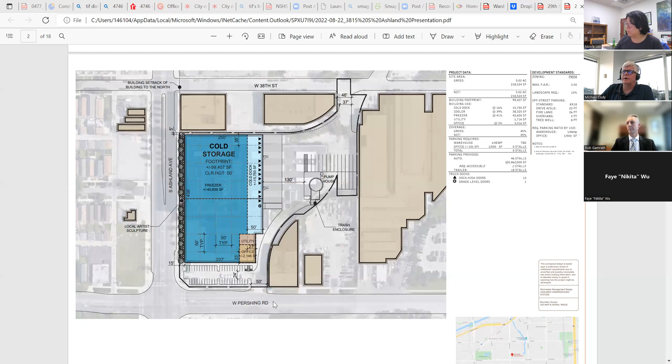If we could proceed to a couple slides later, I mean, we could go through each slide, but there's really not a lot to talk about relative to the adjacent zoning, the adjacent properties in the neighborhood.

You can see the zoning district. We're part of that planned manufacturing district.

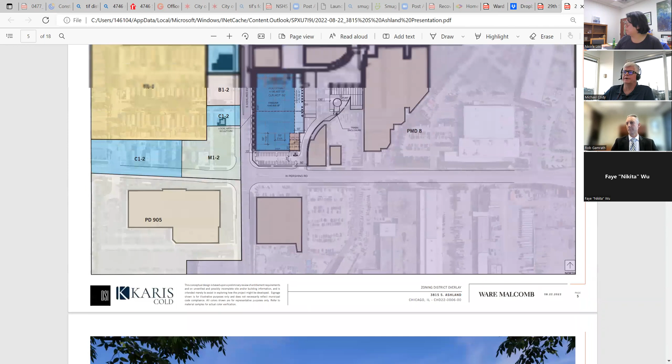The next slide is what I wanted to get to with the rendering, and we can go back if there are any questions. Being a cold storage facility, the nature of the product limits us in some of the design capabilities.

We're utilizing what's called an insulated metal panel, which is a freezer panel. It allows us the ability to be 100 degrees on the outside during a hot August night, and 20 below zero on the inside. We haven't defined what temperature we're going to be, but because of that, the coloring on these panels is very important, so we're limited in the color pattern we can use.

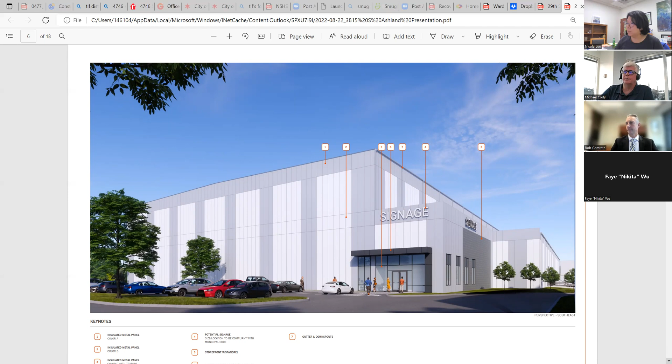But what we're describing here is the architecture that we've utilized. The freezer clear height is 50 foot, and you can see where we've integrated the office at this southwest corner. If you scroll down, you can see some of the other materials we're utilizing on the building.

I'm actually going to zoom into the copy that I have as well. Insulated metal panels with a couple of different colors. We do have signage, obviously, and then storefront. If you can go to the next slide.

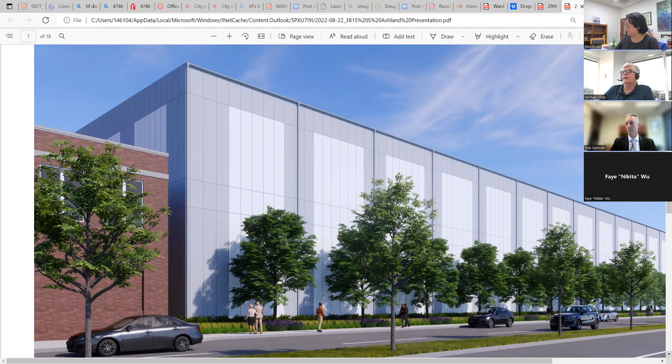This shows the Ashland Avenue side of the building. Again, heavily landscaped. We've tried to create some articulation on the wall that creates an interesting facade. Obviously, being cold storage, we can't pop windows in there, and again, we're limited in the amount of color panel we can utilize. So we've decided as a team, along with the City of Chicago's site planning team, to provide a little bit more of a setback and again heavily landscape that area.

If you go to the last slide, this is the opposite end of the building showing the truck docks. Not very exciting, but it's kind of the business end of the facility. I'll take any questions that anyone has.

Maybe we want to continue to present the whole thing, Rob. Sorry. Yeah, I think that's a good idea, Mike.

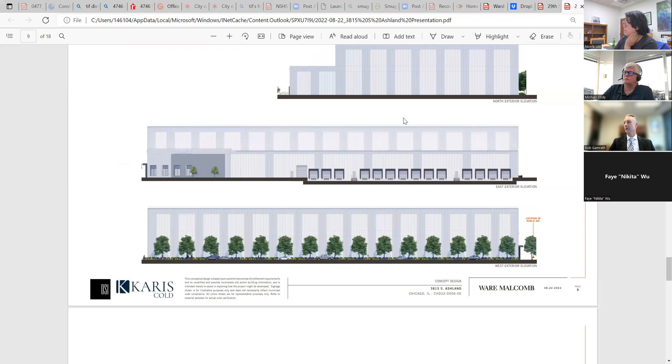Before I have Sarah talk about the traffic study, one other thing I wanted to add to what Mike was discussing in terms of the Ashland Avenue setback. The current building right now, as it exists, is built right to the property line. This building, on its surface, 15 feet may not sound like a lot, but it actually is a considerable amount of setback to move this building back from where the current improvements are.

This will actually also be the only building along Ashland Avenue on the east side from 35th Street all the way down to Pershing that is set back from the property line. So the design team has really tried to work on minimizing the impact, both visually and in terms of how it imposes on the community, and tries to reduce that impact. I just wanted to give that context, that landscaping buffer along there, along with the setback of the building, should help with the Ashland Avenue facade.

Sarah, do you want to take us through the traffic study methodology and the results? Absolutely. Good evening, thank you for having me. My name is Sara Disney Haufe, and I am the Director of Traffic Engineering at Sam Schwartz Consulting.

So you can go just a couple. There we go. My slides are small, not as interesting as architectural plans. So I'll be brief, knowing that we have a limited amount of time this evening and can answer more questions later. But I'll start by describing what is contained in a traffic impact study, since most people don't encounter this type of evaluation on a daily basis.

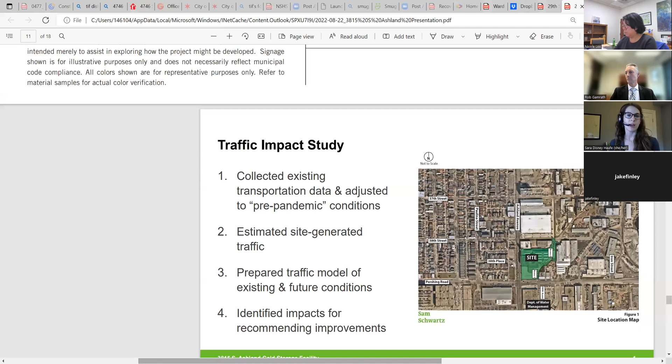Next, we develop an estimate of how much traffic will be generated by the site itself, which you can see outlined in green here, along with its two access points labeled. We then develop a traffic model of what the existing and future traffic operational conditions will be, so we can compare and determine what kind of impact the development may have.

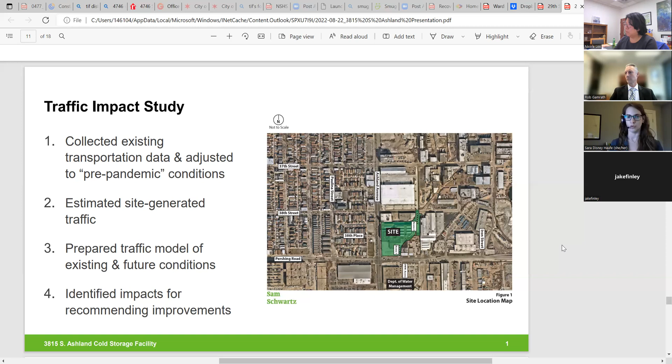And then finally, based on that comparison and our assessment of best practices in transportation and safety design, we identify impacts and recommend improvements for the study area. We can move on to the next slide, please.

Here you can see step 2, the amount of traffic we estimate may be generated by this development. Traffic engineers commonly refer to a reference manual developed by the Institute of Transportation Engineers, ITE, which has for decades conducted surveys recording traffic characteristics of a wide variety of land uses. In this case, we looked at a warehousing use. There is a specific use for cold storage, but the traffic generation data for a warehouse use was a little higher and therefore more conservative, so that's what we used in our study, and that's how we ended up with these numbers.

To summarize, on a daily basis, the expectation is that there would be 200 total trips, and a trip is either an inbound or outbound movement of traffic. 140 of which would be cars, 60 of which would be trucks, accounting for all sizes of trucks, from box trucks to larger semi trucks. For context, the daily traffic on Ashland Avenue is roughly 21,000, and on Pershing it's about 16,500.

We also look at those busy rush hours, the highest hour of traffic in the morning and the highest hour of traffic in the evening, when people are commonly commuting to and from the office and you get that crush of traffic. During those peak hours, we would expect in total 20 inbound and outbound trips during both of those peak hours. We can move on to the next slide.

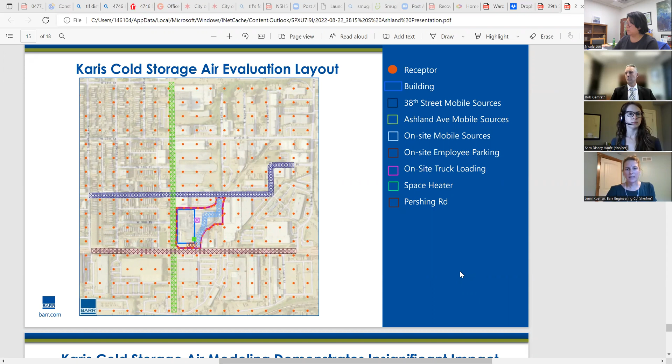Just to give you a sense of spacing here, we have about 15 meter, or 50-foot, spacing receptors around the fence line, and beyond the fence line we have 50 meter, roughly 165 feet, spacing.

The significant impact level is a regulatory level used to determine whether a project's highest modeled impacts demonstrate that its overall potential air concentrations are insignificant. That significant impact level, or SIL, is listed in the second column in micrograms per cubic meter, a unit of concentration per mass volume of air. This shows, for each pollutant evaluated and the appropriate averaging times, that the project impacts are below that significant impact level by an ample margin. You can see in the right column the percentage of the SIL.

For example, the PM10 24-hour SIL is 5. Our project impacts for all the sources shown in the previous slide are 0.12 micrograms per cubic meter, meaning we were 2.5% of that SIL.

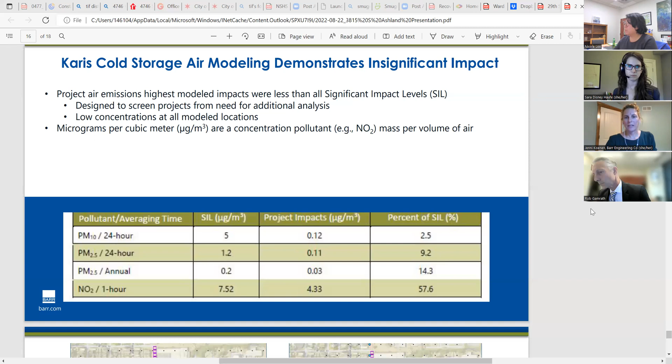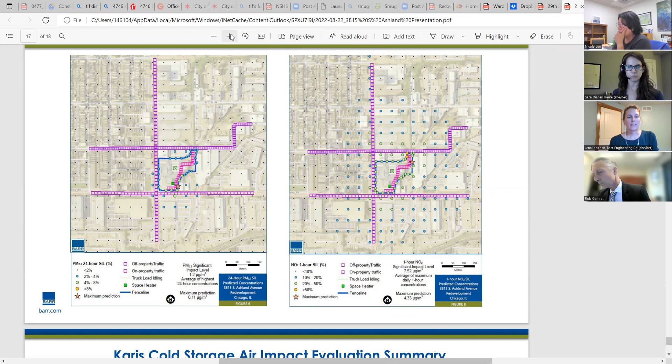These two images are also posted with the air quality impacts report. The one on the left shows the 24-hour PM2.5 modeled results, and the one on the right shows the 1-hour NO2 project impacts. The different colors represent the various percentages of the applicable SIL. The highest modeled impact is occurring at the fence line in the southeast corner near the space heater and some of the on-site truck entrance and exit on the southern end by entrance 1, denoted by a star.

You can also see how the impacts from the project decrease rapidly the further you travel away from the property. Looking at the legend, the size of the dots starts to shrink with lower impacts, decreasing further the farther you get from the project. But all of these results are all well below that significant impact level.

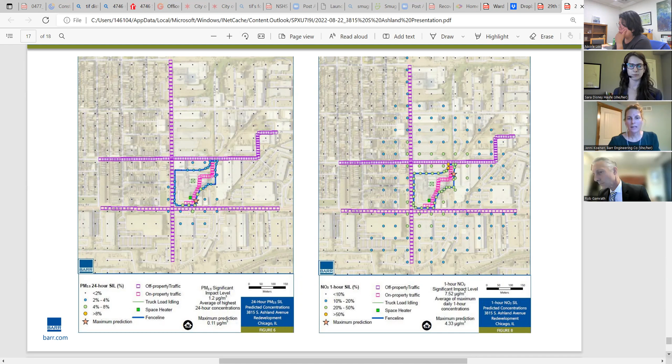To summarize, the project modeling approach followed the current 2021 City of Chicago recommended guidance and Illinois EPA's recommended practices. The project's air impacts were less than the significant impact levels for all of the pollutants evaluated, demonstrating that the proposed project is not going to significantly contribute to existing ambient air in the surrounding area. Thank you very much.

Thanks, Jenni. I don't know that Jake has— oh, I see Jake. Great, you were able to connect.

If you could maybe just talk a little bit about Karis Cold Storage and the cold storage operations generally, and the distinction of cold storage compared to typical warehousing uses. Sure, thank you, Rob, and everybody for participating.

It's important to note that we've spent a lot of time and work, as you've heard, making sure this project is a success. We've done other projects in the immediate area, not too far from here, and that was a large reason why we wanted to be in this area, as it had been very successful for other similar projects. We have another cold storage facility just down the street at Ashland and 43rd, and what we've noticed is that truck traffic is substantially less on cold storage projects than traditional non-cold storage projects, like the e-commerce facilities in the area.